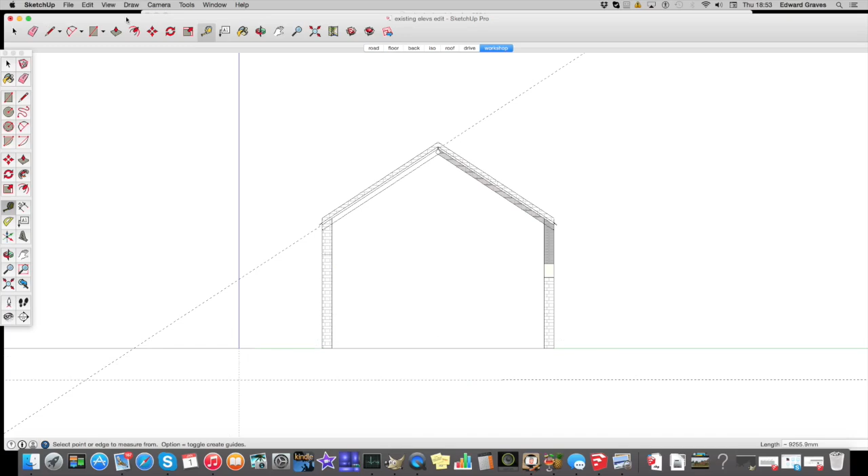So we have our house, we have our square to work with. What do we do? I don't know what to do, but I've got a rough idea.

So we need to think about how we're going to get into the house. Primarily, the pond is here, the road is along the top here, and the drive comes in here. We are going to park here, or one of us is going to park here, and the other one's going to park either here or by the house - the big house, sorry. So we've got pretty much...

We either come in this side, because you can make a nice walkway along here by the pond, and come in the side of the house here somewhere. It would be grander, nice to have a front door, a nice welcoming area, but it's putting a hole on the roadside - that's more openings, and planners do not like holes on the roadside. So I didn't see the point in annoying them.

So we've decided we're going to have to come in here, or here - to which I decided here was the best way. Nice and sheltered from the wind from both sides. I could possibly put a little roof across it, nice and somewhere to come into your home. And that would leave all this space. I can put the drive up to here, with a retaining wall and some steps or a ramp here. So we've got our entrance.

Also, mains water is over here somewhere, so that can come straight into what will eventually be a boiler house. And what is also nice is I've got a box.

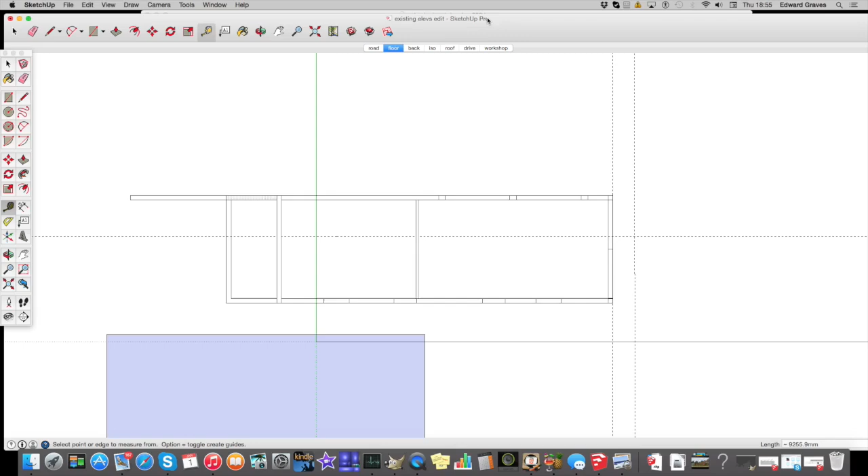From the back, it looks like so. We have these doors and the windows. This is the barn I'm taking down at the moment - that was the wall that fell down, the really bent bit from the drive side. This is where we started - this was very episode 1. This wall here was leaning more like that.

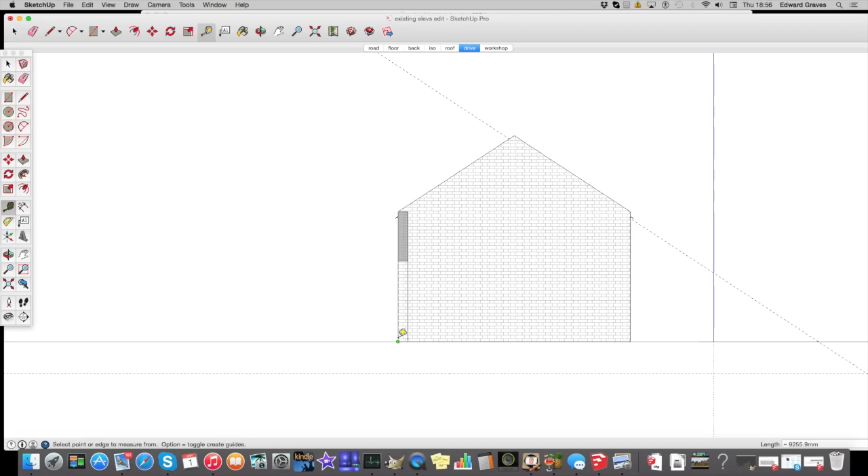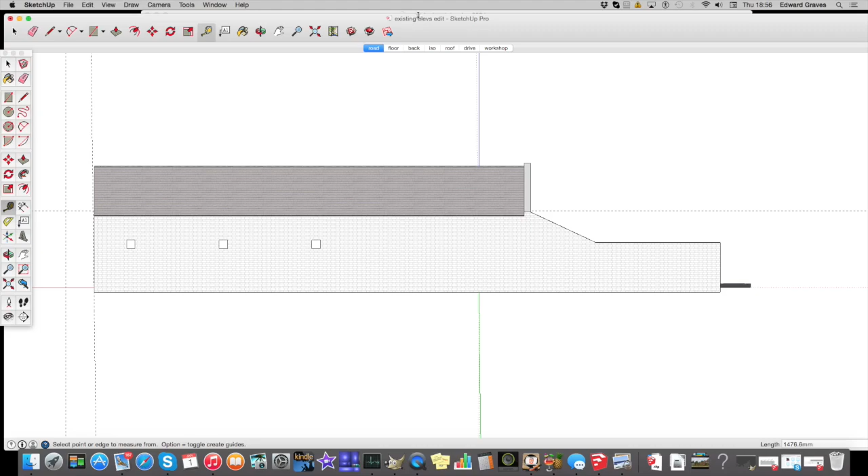We took that down, and then there's the roadside along here. We are currently salvaging this wall - we're up to about here somewhere, I think. This wall unfortunately came down, which really was an issue and is an issue, but either way, we'll get over that. So we've now salvaged a good corner, and we've only got this little bit left to do. I think that's going to take about the same amount of time as this bit did, but these bricks are coming off nicely. Either way, this is the original barn.

Back on track. This is the space we had to work with. So what did we do with it? We designed this. We've got the back door, looking straight at it. Let's have a bit of a 3D view. Much prefer that. Here's the back door where we're coming in.

There's that wall that was really drunk, all rebuilt in the same bricks. I was going to say this was still meant to be the original wall - isn't going to be now, so I've got to rebuild that.

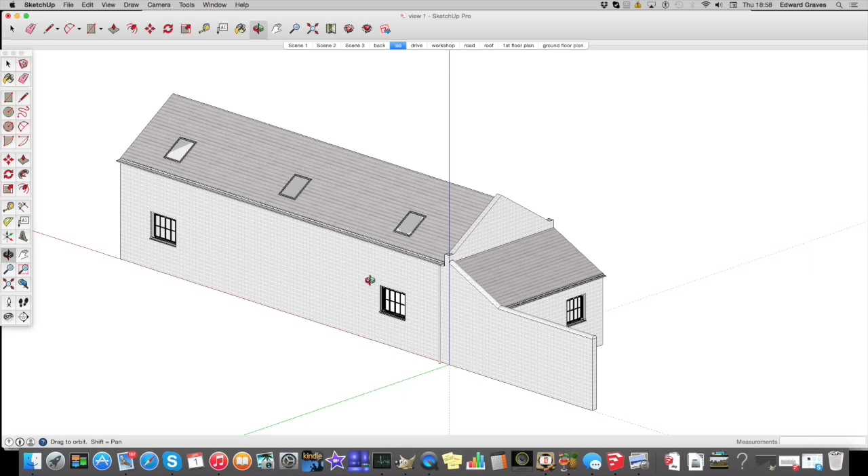Like I said, these will all look the same. These windows I'm not actually going to put in now. These were from the original working drawings, and the way - because they just wouldn't grant us planning permission the normal way - these I'm going to brick in. I will put the lintels across for them, and I will put the closures and the returns on either side, but then I'll just fill them up with bricks in the middle, so it looks like a blank wall from the outside. But it's still potentially, in the future, if they are kind enough to let me retrospectively put these in or something, I will be able to do that.

Here's the design - roof lights. Also, I like roof lights. You can blend these into a roof very nicely. They're not as obtrusive as on just a basic wall because they're above eye line. So I've put them in as much as I can.

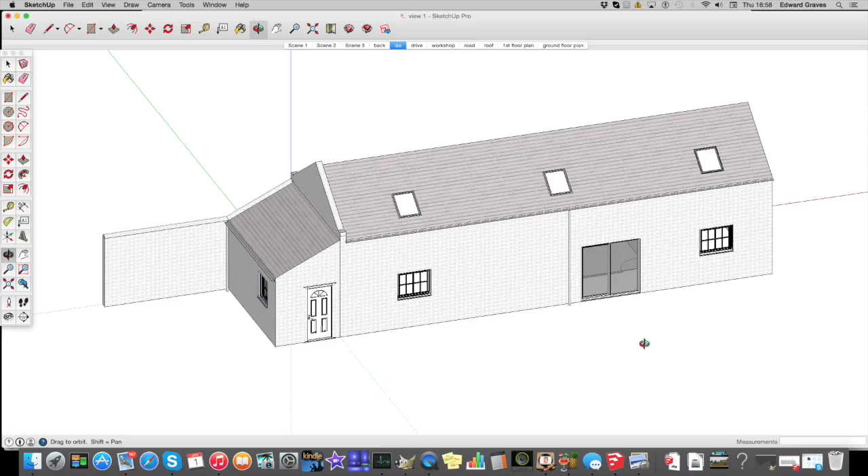So then we get to the plan. Where's the ground floor plan? Here we are. The main way into the house. There is another set of French doors here, which you saw, but for some reason my drawings aren't playing ball, and this line here is all blurred. It's a very grubby drawing, but it's here. You come into the house.

I could have knocked through this wall. Obviously now I could change this up loads now because that wall's come down, and I can put a steel through here. I'm not going to. I like the layout. It works, and here's where I explain why.

In my house at the moment, we live on a farm. This barn is still on a farm. There is mud on farms. You don't want to be having to go straight into your kitchen with wet coats, muddy boots, anything like this. This is essentially a boot room. They are brilliant ideas - they are where you kick off your dirty boots, you put your wet coat, and then you go into a nice warm kitchen.

It's not an entrance hall, it's not a glamorous place. There's mud, there's wet stuff, there's laundry. It's just a fact of life, and if we were going to have a grand entrance hall or anything, a front door, it would have come through here. So either way, we're not - we're just going to come into the heart and soul of the house, into the laundry room.

Take your coat off, take your muddy boots off in the area. This here is the boiler room. You need a boiler room, especially with air source heat pumps, which is how I plan to heat this house. It's a nice big room - we've got approximately 1.3 metres, so 1,360, you can get 2 600-litre tanks in there quite easily, and there's a bit of room to walk around. And the primary objective, a toilet.

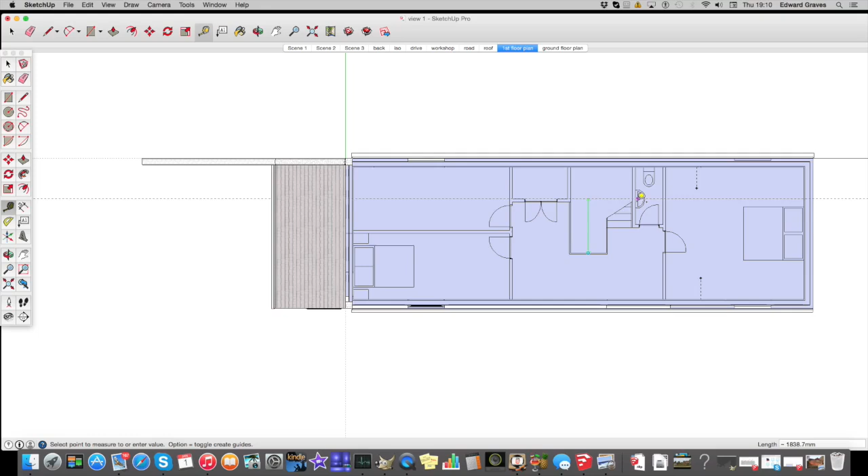So yeah, that's how we've got a 3-bedroom, or 2-bedroom and a study or office, or 2 bigger bedrooms, however I decide to lay this out. But it was just making sure it all worked and where all my vent pipes are going, because there'll be a vent pipe right here. You'll notice this here's stairs.

Oh, you can't actually see it, I think it's that wall. Why haven't I lined these up properly? Here lines up with about here, so I can get a 4-inch soil pipe internally boxed in there quite nicely, and it'll just be a little box next to the bath, because this is all going to be made up anyway.

And outside, there will be one vent pipe up here, and I think I may have to have a little Durgo valve in here somewhere, but meh, it's downstairs, that'll be fine. But like I say, everything is on the front of the house, water-wise. I don't even know what else to say, I think that's explained it quite well.

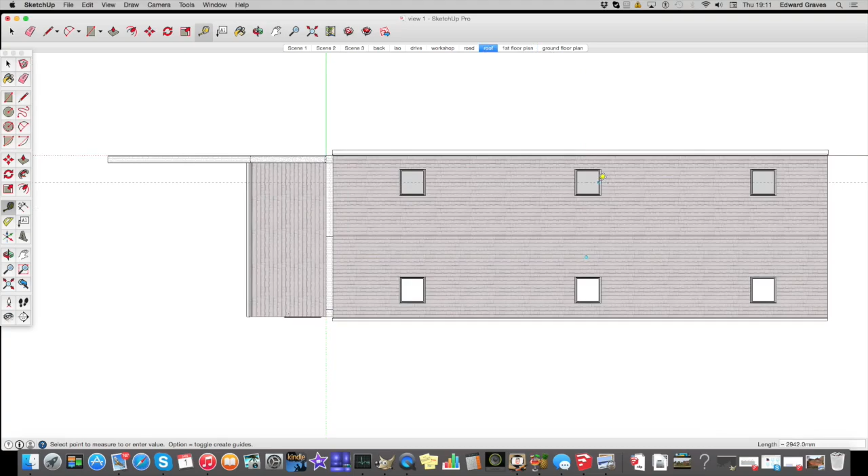Roof, obviously, as many roof lights as I could possibly get to get some light in there. This one is directly above the stairs. My drawings just don't line up, do they? But it's directly above where the landing is, so that will let a lot of light into this area.

This might be a bit dull at the moment, this will also be a little bit dull. They've both got windows allowing light in. This one should be fine, although this is the south side, so we're losing a lot of light because I'm not going to put these windows in yet, but I'm hoping it'll be okay, and I am preparing to allow them to go in.

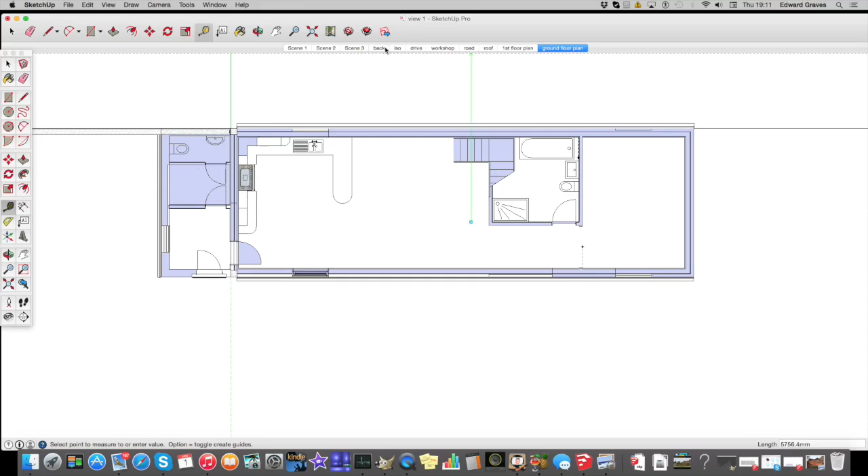So yeah, I hope that helps. Not when I say it helps, I hope that was entertaining. I hope you have learnt what you wanted to know about how I designed this here house from measuring it.